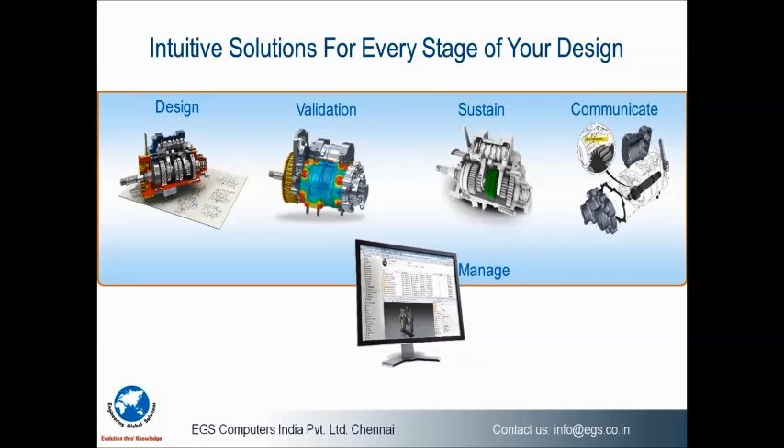So in this, we are going to see the two new tools. One is MBD and another one is Visualize. Okay, what is MBD? MBD helps to define, organize, and publish our 3D product manufacturing information to the manufacturers. It helps to streamline our productions, cut our design cycles, and make error-free diagrams. And we can also comply with new standards of drawings with MBD. It mostly helps us avoid misinterpretation of 2D diagrams.

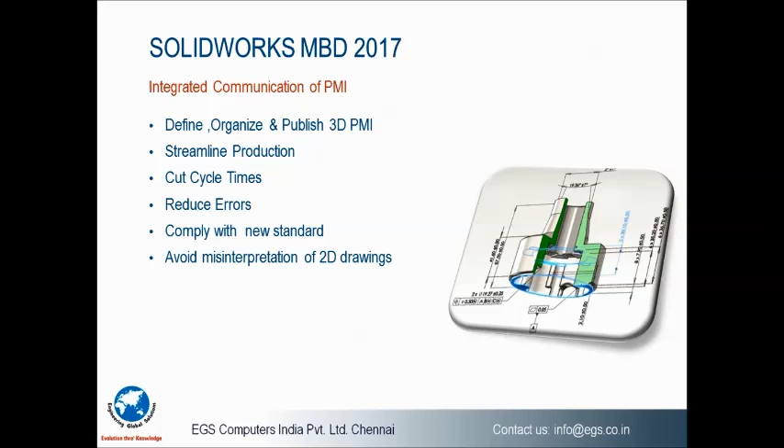Okay, one of the major areas we are going to focus on today is technical communication. And the problem is today we are still communicating with 2D orthographic diagrams, using things like dimensions and tolerance in order to define the design intent. Okay. So this is basically our 2D orthographic diagram. Mostly we use these diagrams to communicate to our manufacturers, correct?

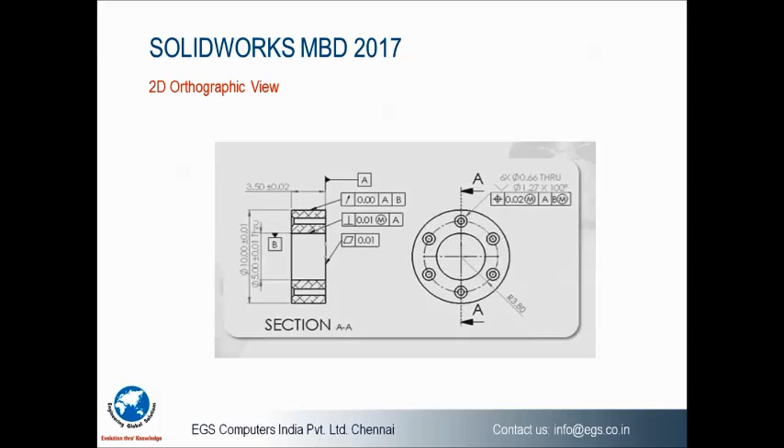So what is the problem in that? Most of our designers spend more time creating these 2D diagrams, and it is time consuming and also very costly. Still our design team is spending more time on creating these 2D diagrams. So what has happened exactly? Due to this our cost and also our time was increasing.

Okay, so coming to the solution. What is the solution to this? Previously, we would create our designs and after that go for 2D diagrams. Now these MBD tools help us designers to create the designs and also communicate the product manufacturing information in the design stage itself. Okay, what is MBD? MBD is a practice of using the 3D model, such as solid models, product manufacturing information, and associated metadata, to define the individual component and also the product assemblies.

Okay, so what is MBD? MBD is model-based definition software. It's a practice of using the 3D model, such as our solid models, product manufacturing information, and associated metadata, to define the individual component and also our product assemblies. Okay. So now I'll just go a little bit deeper.

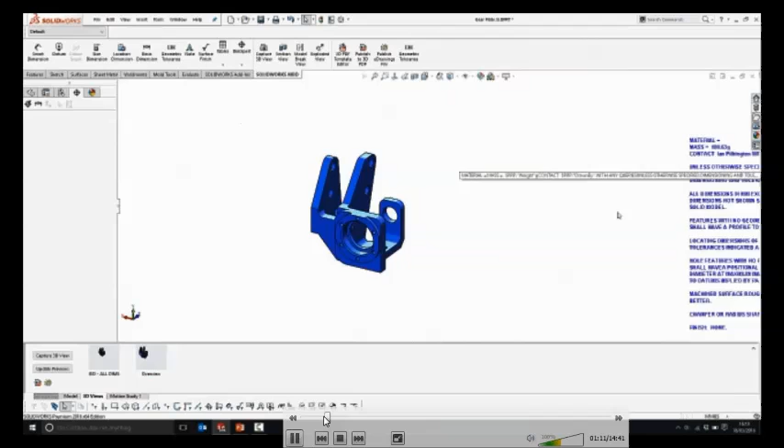And also whenever you have library features like annotations or notes, we can easily use them from this library. Previously I just created these annotations. Now I can go to the library, drag it and put it on the screen. And this information gives all the manufacturing information. And also we can customize these annotations.

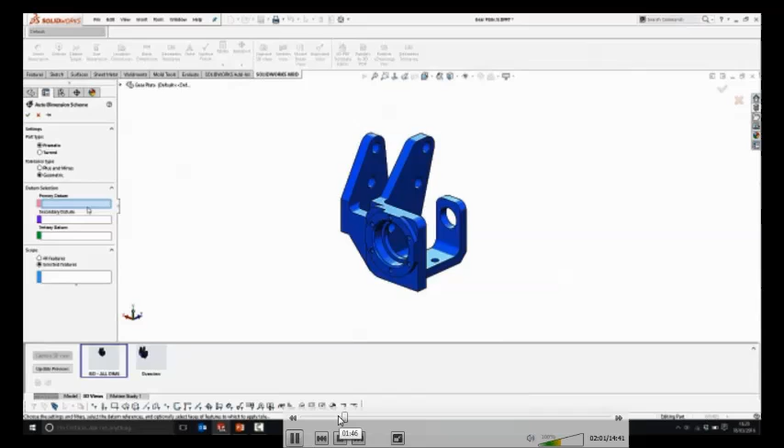Next we are going to see the auto dimensioning scheme. What are auto dimensioning schemes? Here we have two types of methods: one is prismatic, another one is turned. Mostly for milling components we go for prismatic, and for turning components we go for turned.

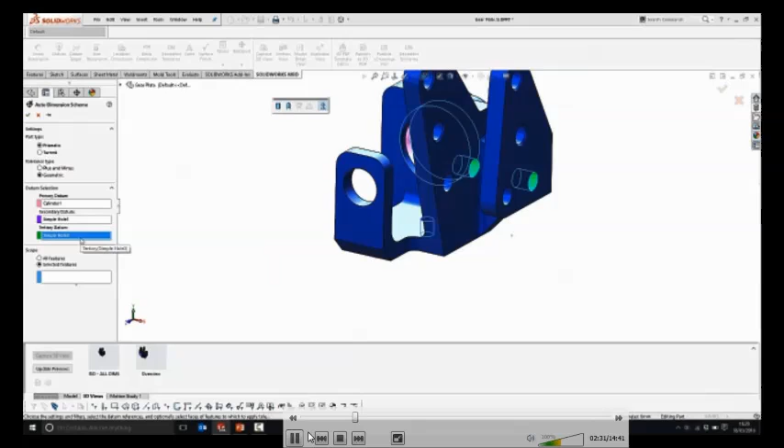So now in this part we are just going for prismatic, and for creating the tolerance I am selecting the reference, and also I am selecting these two holes. So here I have just given the primary, secondary and tertiary datums as a reference for creating this tolerance.

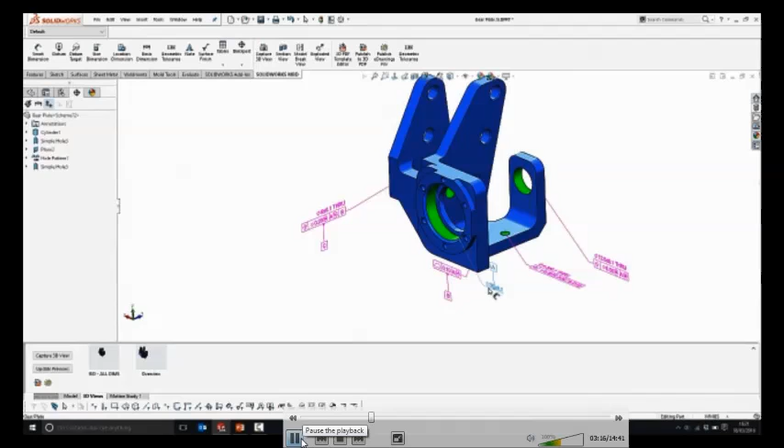And I can select these two surfaces. Here is the beauty of this MBD: once the part is fully defined, it will show in green color. Now I just selected these two surfaces for creating this tolerance and dimensions and also annotations, which we have previously noted.

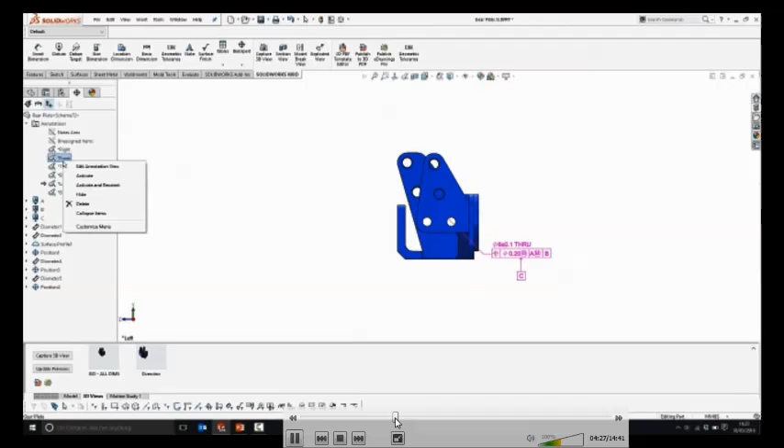And in this dimension manager tree, we are able to see the datums, dimensions, surface profiles, and the tolerances which we have given. And using these views, we can easily rotate the views also.

So mostly on the manufacturing side, whenever you are going to manufacture any part, we need some views, correct? In this we can create our own views also. We can customize the views also. And after customizing the views, we can give all the dimensions, tolerance values and annotations, and we can easily capture this. Here I'm just selecting and giving some dimensions from this hole to that hole.

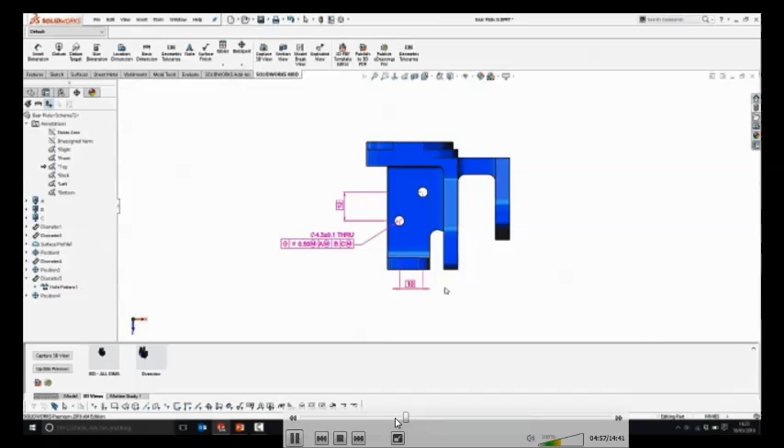And one more advantage is, we can easily change the annotations from one view to another view, and also give some tolerance values. And after giving this, we can orient this view.

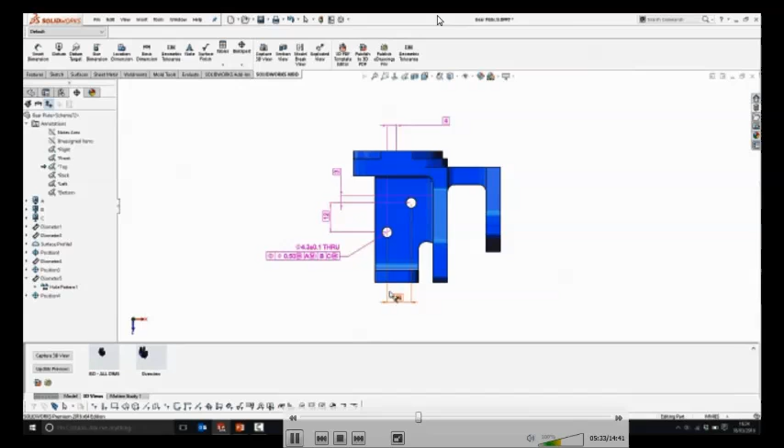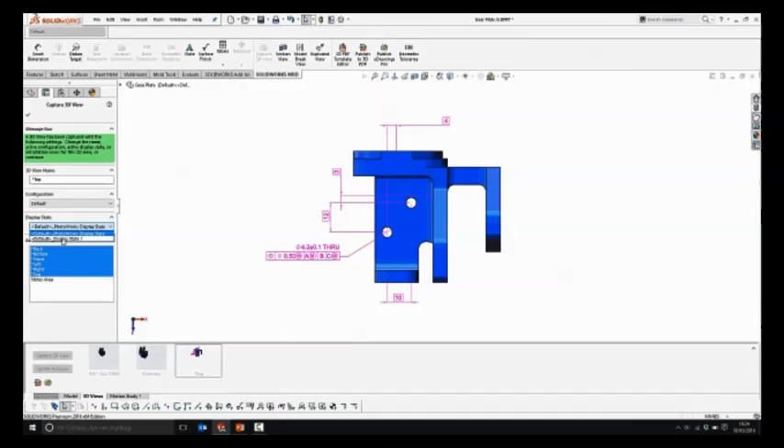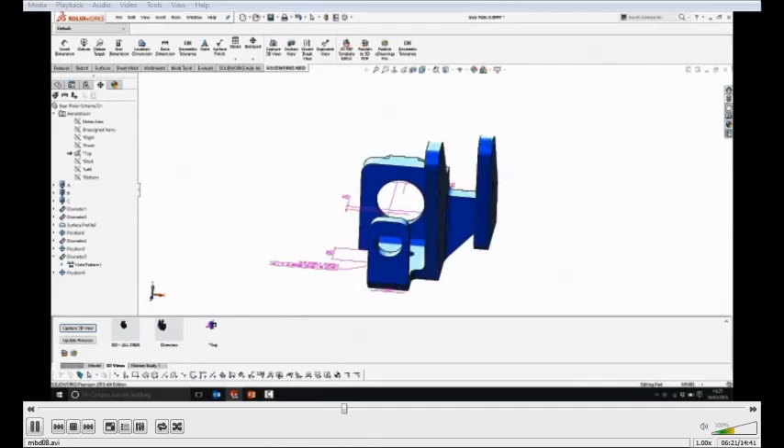Hello. Hello. Hello. So on. Hello? Sorry, gentlemen, kindly unmute yourself. And one more. Can you hear me?

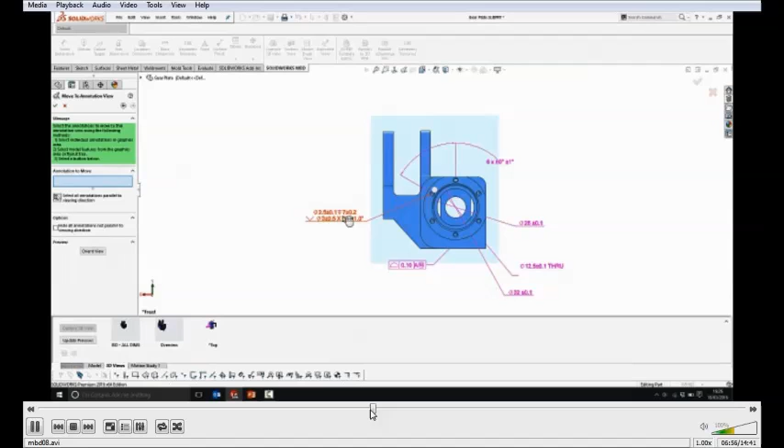One more advantage of creating these dimensions and annotations: we can capture these annotations and dimensions from one view to another view. I'm just capturing these annotations and transferring them to another view. And once they are transferred, we can easily keep them in one view, and you can capture the view also. So like this, we can create our customized views, which are mostly required for our manufacturing information.

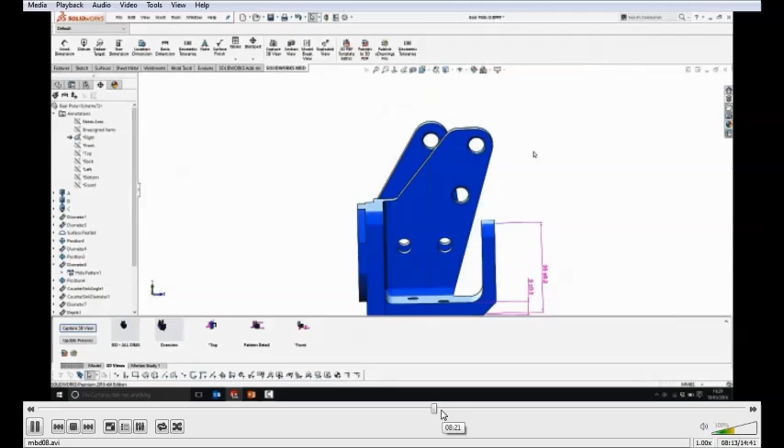Exactly how we give the dimensions for a part, we can easily give them for the part in MBD also. We can select our own standards also. We have different types of standards like ISO, JIS, like that. By default it will take the ISO standard. We can customize our own dimension standards also. And after giving the dimensions, we can easily capture the view, and we can easily switch to any view also.

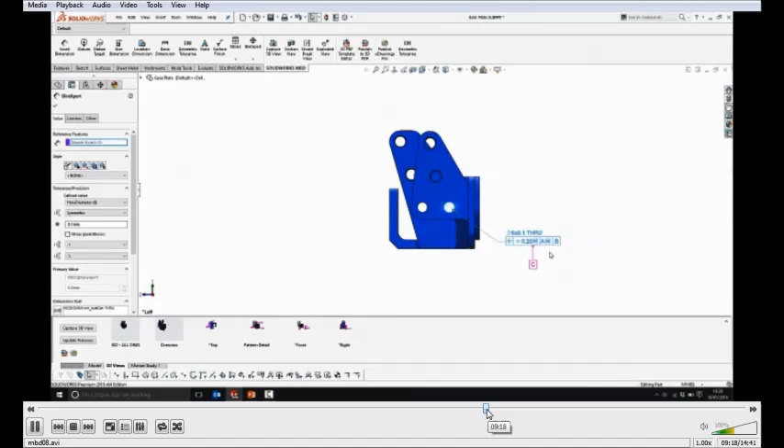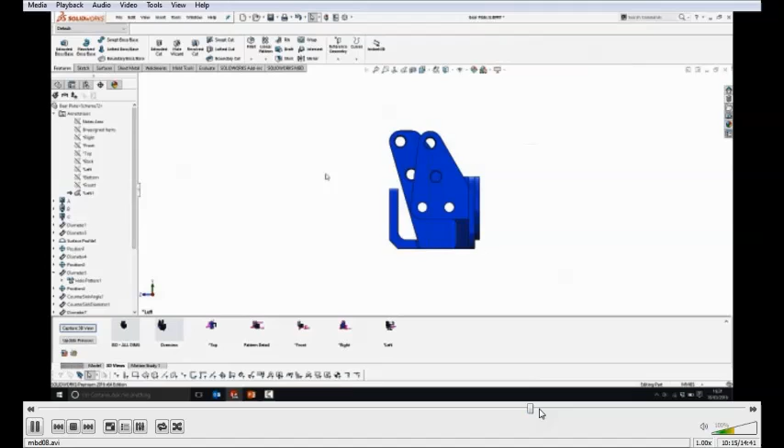So here I have given all the dimensions and information required for the manufacturer to manufacture this component. So I have got the dimensions, annotations, and also the reference datums, with which the component can easily be manufactured, after capturing this view. And I have given the annotations also.

One more advantage in MBD: we can go for section views also. You can easily section the views. And also we can transfer to display states. And after that we can capture the views. At any time I can activate any view. So it is very easy for identification, and to get all the information about the particular part.

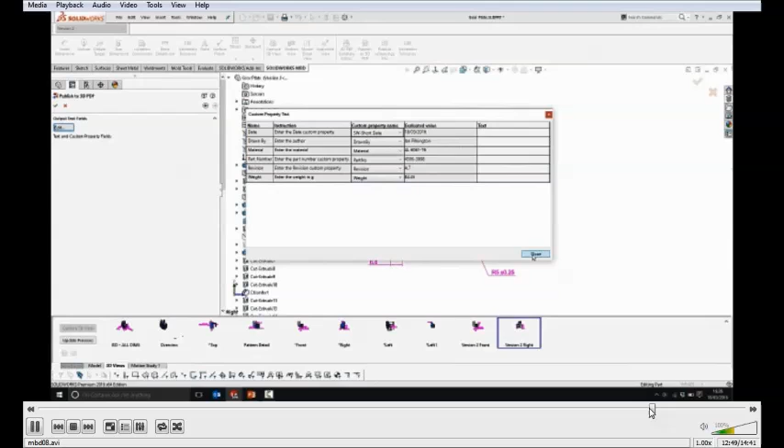And now I'm taking all the information to the 3D PDF. While sending to the 3D PDF, I can select my own template also. We can customize our own template, or we can create our own template. After selecting the views we want, we can select all the views which we want to export to 3D PDF. And while exporting the 3D PDF, we can also customize our own properties, exactly how we give the properties for a part.

I'm just exporting to 3D PDF. The information which I created in this part is easily exported to 3D PDF. The main advantage in the 3D PDF is we can easily rotate, zoom, or pan the views. And you can easily see the notes and annotations which we have given in the right corner, and the date, times, material, mass calculation, whatever we have given, it will easily update in the template.

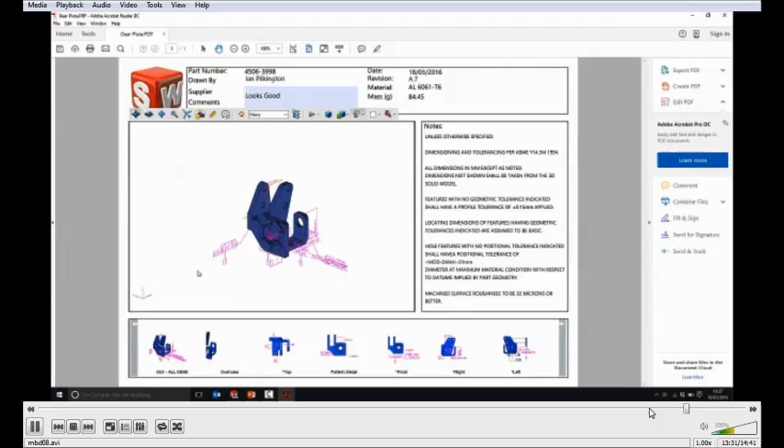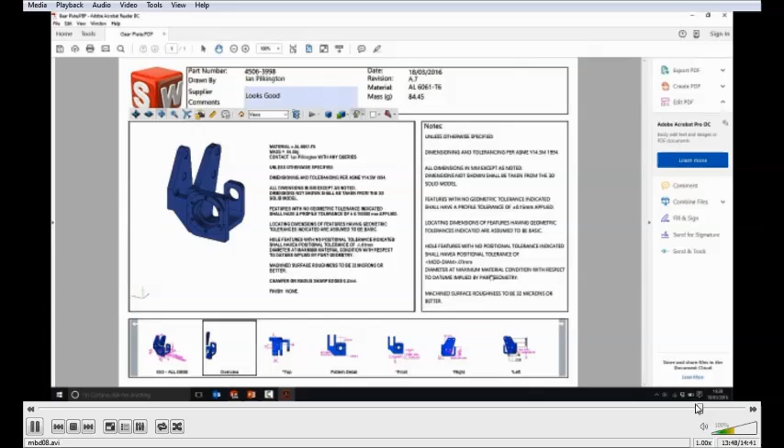In this 3D PDF, we can switch to any view, and you can also write some comments to the supplier. It is very easy to communicate. The supplier can easily view the component in 3D, not in 2D. And the annotations which I have given, we can also get them in the 3D PDF. I can switch views.

So the annotations and geometric tolerances which I have given in the views, we can easily shift to all the views. Now we can easily check them in this 3D PDF by simply rotating and zooming. The same thing we do in the part, we can do here in the 3D PDF, simply by rotating and seeing all the annotations.

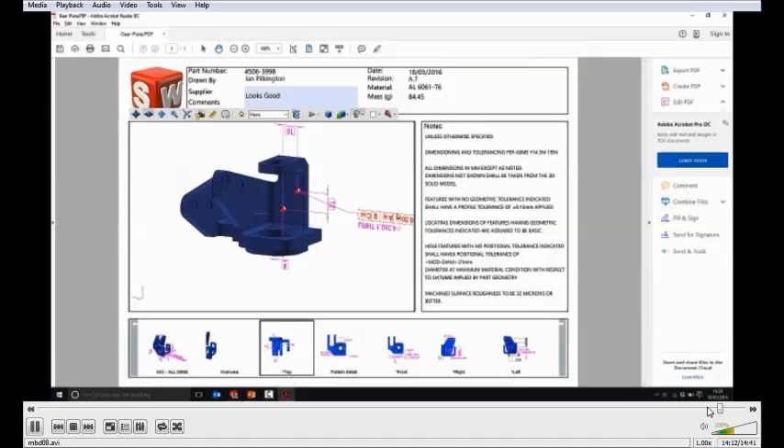And one more thing, we can easily transfer all the information through eDrawings also for technical communication. I just created the 3D PDF, and after that I just sent this diagram to eDrawings. In eDrawings, same thing, whatever views were created, automatically it will be updated. I can shift to any views. I can see all the tolerance values, dimensions.

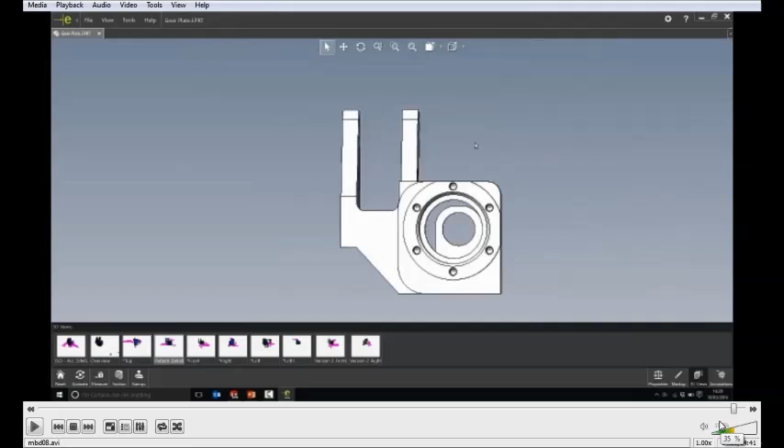The tool is easy to communicate for our suppliers. So here I'm shifting the views, and I can see this tolerance.

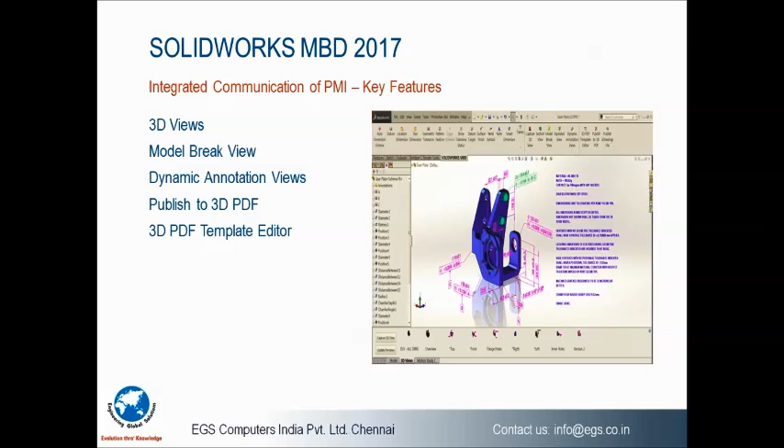Okay, so this is one sample video about creating 3D views, model break view and dynamic annotation views, and how we can publish a 3D PDF, and also how we can create our own customized templates. So these are some of the key features in MBD. It helps to capture the product manufacturing information.

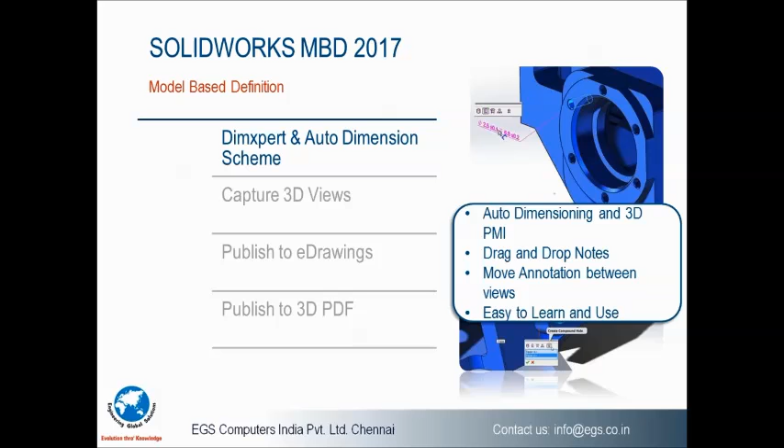So in this video we have seen how to create the auto dimension by using DimXpert, and same thing, how to move the annotations between the views and drag and drop the annotations. And we have seen how to capture the 3D views also.

And in capturing the 3D views, we can use the configurations also. Multiple configurations of the views will be captured. We can shift to any configuration, and you can capture the views also. So that particular view which contains the dimensions, tolerance, everything will be shown here.

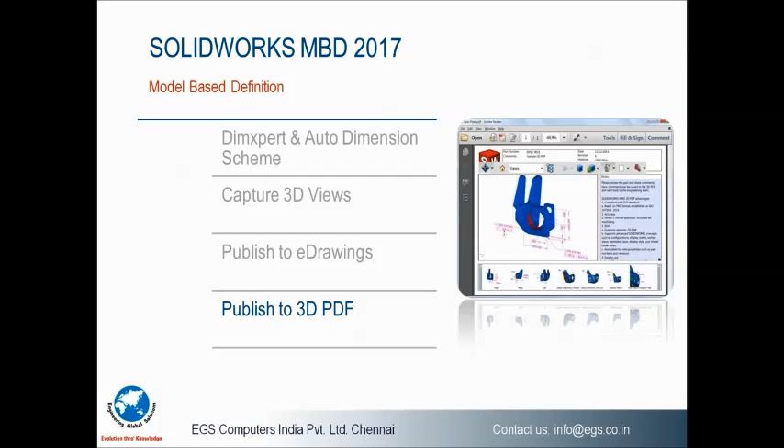And also we have seen how we can easily publish these details to eDrawings for technical communication. And also we can publish these to 3D PDF. There we can rotate, zoom and pan the views, and we can easily identify the part and also what tolerance dimensions we have given to the part. It is easy for the manufacturer to manufacture this part.

Okay, so finally, what are the benefits we are going to get? Using this MBD, 30 to 50% of design time will be reduced, because most of our designers were spending most of their time creating detailing diagrams. So through this MBD, any designer can give all the tolerances and information required to manufacture in the design stage itself, and also he can capture the views and the annotations.

So now in this case, we have just created the model in the SolidWorks environment, and due to this MBD, we can give all the information related to the manufacturers in the same window itself, and finally we can publish this into eDrawings and also 3D PDF. And here we have an easy option for portable delivery. I will explain this portable delivery in the next slide. So due to this, our cost will be saved, our efficiency will increase, and it is fully error free.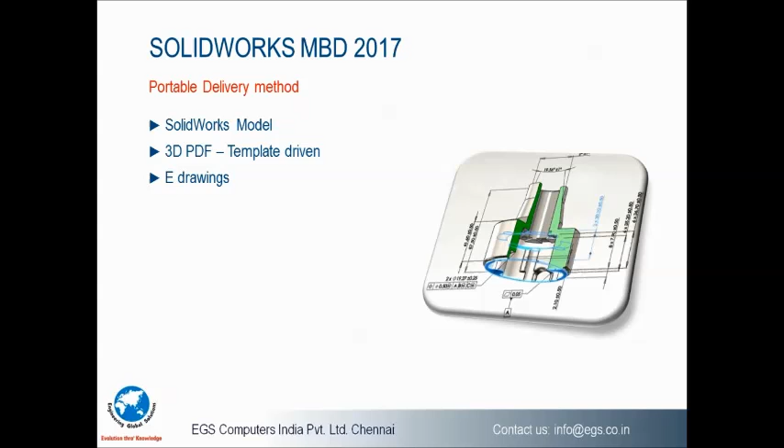In this MBD, we have 3 portable delivery methods. That means when we give the information, we can give it as a SolidWorks model, in 3D PDF, and also as eDrawings.

And these are the benefits of using this MBD. The first thing is drawingless manufacturing solutions, and it is an integrated tool which works inside SolidWorks. It helps give the manufacturer all the information directly in 3D. It helps to reduce our design cycle with error-free diagrams, and it mostly helps to improve the quality of our diagrams also.

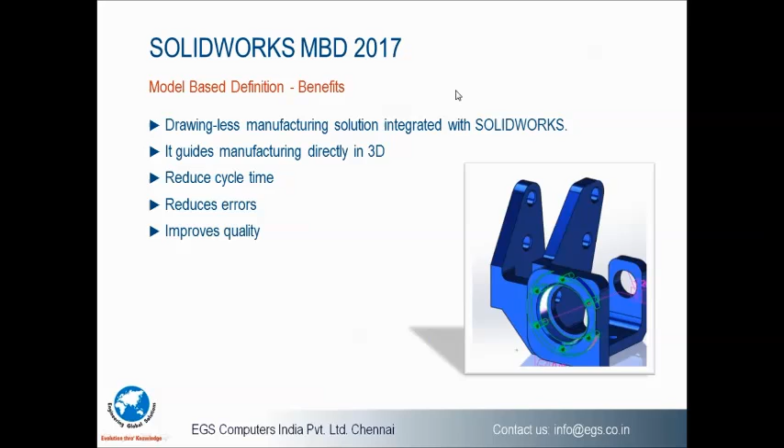So that's all about MBD. So next we are going to see a small demo on Visualize. So these are the benefits of MBD. And next we are going to see Visualize. It is a new tool. So mostly it helps to give photorealistic images, and also it helps to create professional images.

And a new home screen, giving a more centric experience when accessing recent projects, tutorials, tips of the day, helping you get the job done fastest. What is Visualize? Formerly, SolidWorks Visualize was known as Bunkspeed, and it is a standalone software.

It mostly helps in industries related to creating marketing documents, and also for rendering capabilities. So who can use this Visualize? Mostly designers, engineers, marketing, and all who are related to content creation can use Visualize, and it is a very easy to use tool.

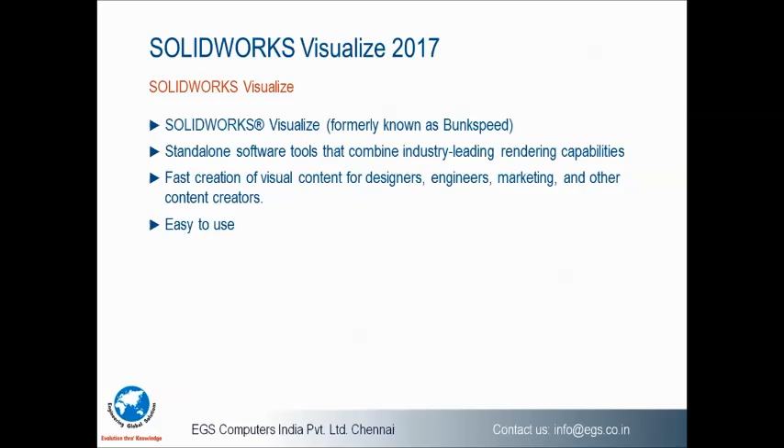And this is our new home screen of Visualize. So you can see on this right side, we have this option called tip of the day, and also at the bottom you have the link. You can directly access the help files of Visualize and what's new in 2017, everything.

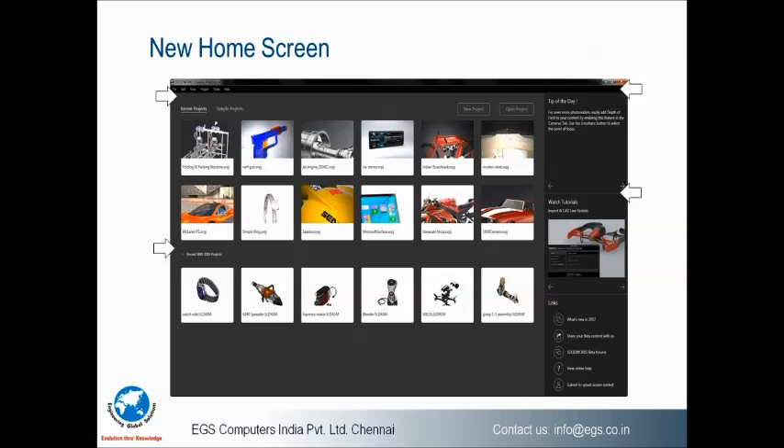And here we have recent projects. So whatever projects we have taken into Visualize will be in here, and we can easily open them one more time. And these are sample files which we have used in 2016 or 2017 Visualize.

We have two packages in Visualize. One is Visualize Standard, another one is Visualize Professional. And today we are going to see Visualize in depth. Whatever explanation I am going to give, it's for Visualize Professional. This is the main concept of Visualize. First we'll open the CAD file, we'll do painting, and also we'll create the scenes. We can add some cameras, and finally we can go for rendering.

So first, this is the graphic user interface, where you can select the new project. Once you click new project, you have the option of creating new projects, and we can easily import the part. After that, here we have an option called monitor file. Actually, what is the use of the monitor file? For example, suppose in SolidWorks you are doing the part model, you are bringing it directly to Visualize and you are doing the rendering.

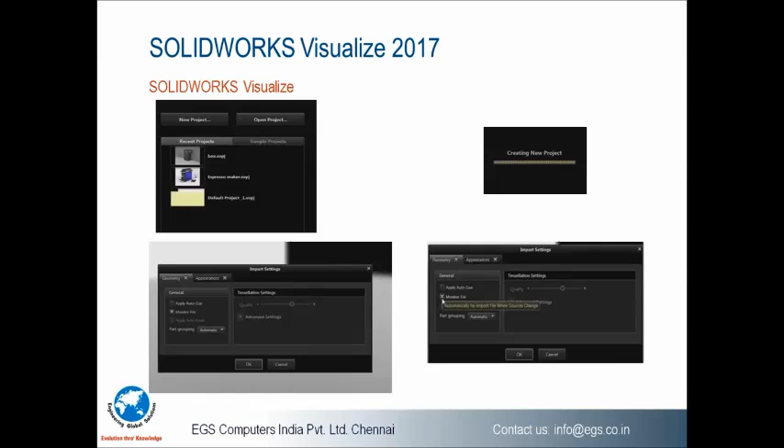So after that, I'm just changing the part files in SolidWorks. It will get automatically updated in Visualize. Whenever you re-import the same part file, the source file, it will get automatically imported. So that is the use of this monitor file. There will always be a link between SolidWorks and Visualize. In the coming slides, I will explain how we can use this tool.

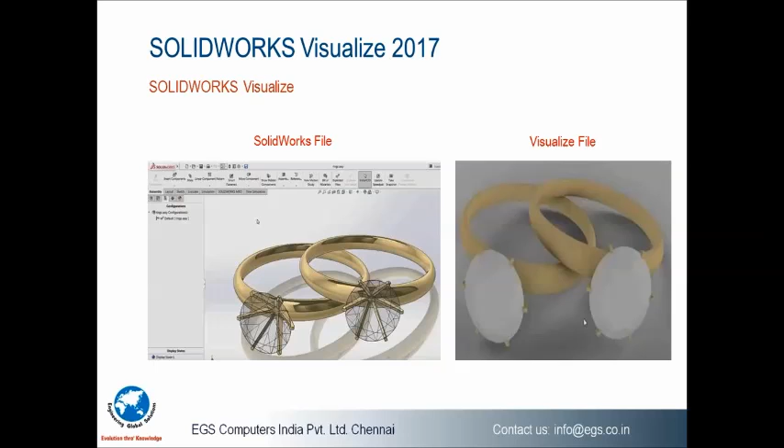And now you can see this. I have just taken an example of the ring. The particular ring which we created in SolidWorks, and after that, the same file which we have shown in Visualize. The colors shown in Visualize are the colors which I have given in SolidWorks. Just have a look at this video.

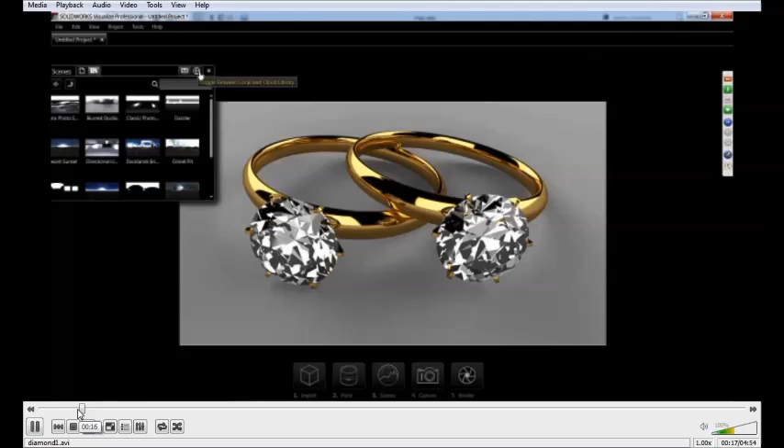After importing this part, I am selecting the appearance. So here we have a number of appearances, and we can also customize our appearance. Wherever you have any images, we can download them. We can create our own scenes also, which helps for creating a new environment. I'm just selecting the surface. I have just given some appearance.

The same way, we can zoom it, pan it, and also rotate it. So here we can go for rendering options. In this rendering option, we have the options called preview and also fast. It's mostly related to the graphics card. First, I am just going to render this one as fast.

So once I have given this appearance, and also the camera and environment settings, I am just going for rendering preview. You can see this final component which was rendered, and also you can see this animation in Visualize of the particular part.

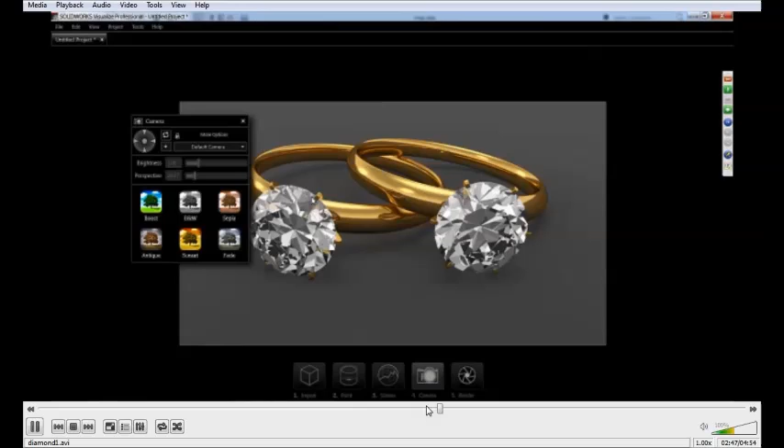So I'm just adding a camera to this. For example, if I want to adjust the light settings, through the camera we can adjust both brightness and perspective. I'm changing the brightness in this. By default I have some brightness in this.

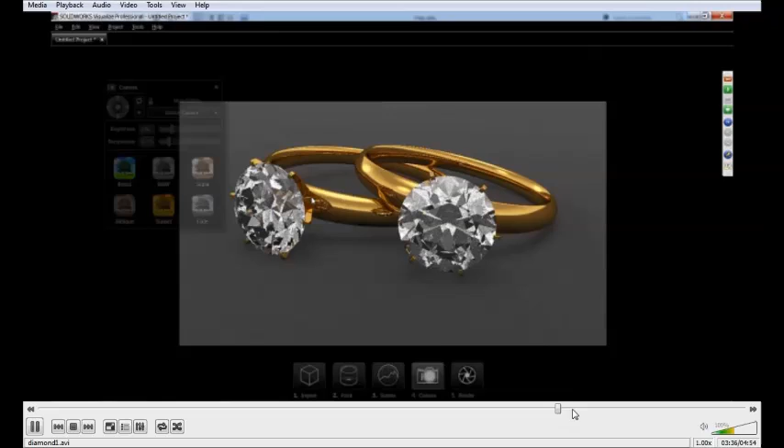We can also get these by downloading from the internet, like sunset and other environments. Whatever images we select, we can upload them and apply them here. This is the most important thing. After that, selecting the render options, we can set our own resolution. You can see in size, we can set our own resolutions. By selecting our own resolutions, we can also set the time.

And finally this particular component has been rendered, and this is the image file. See, these images are the images which we have created in Visualize.

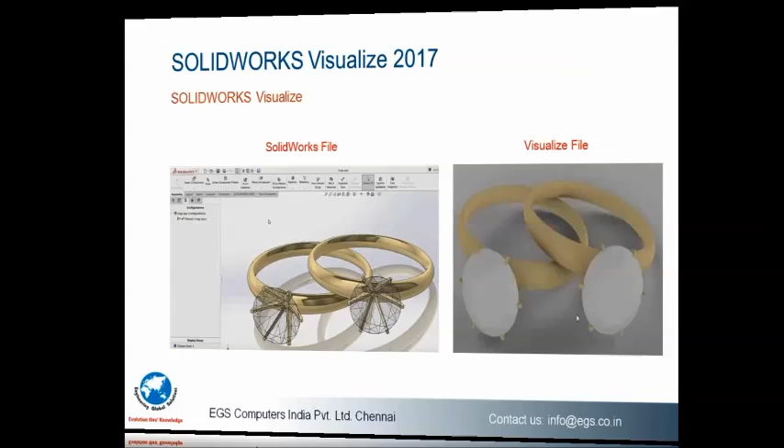Then we can come to see these import options. SolidWorks Visualize has the capability to import different file types. We can import Autodesk, CATIA files, ProE files, Solid Edge files, and Inventor also. So these are the import capabilities.

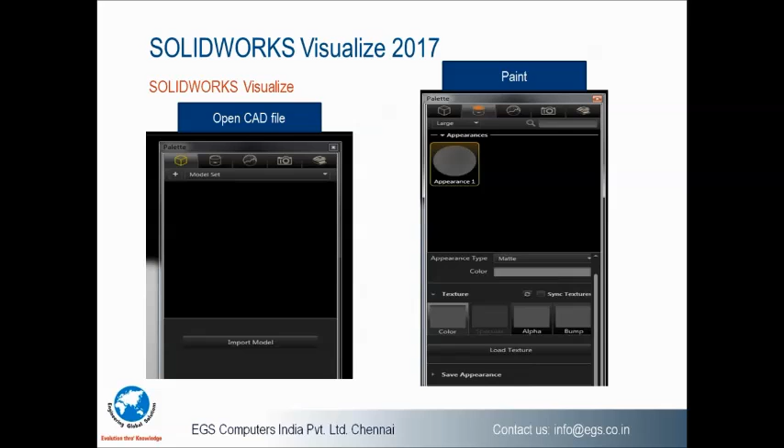So previously I explained the concept of Visualize. First we open the CAD file. This toolbar is called the palette. In this palette we have 5 options, like model set and also appearance. I will explain them one by one. First, for opening the CAD file, we go to the model set. There we have the option called import model. And for giving paint, we have the option called appearance. There we can set the color and also textures.

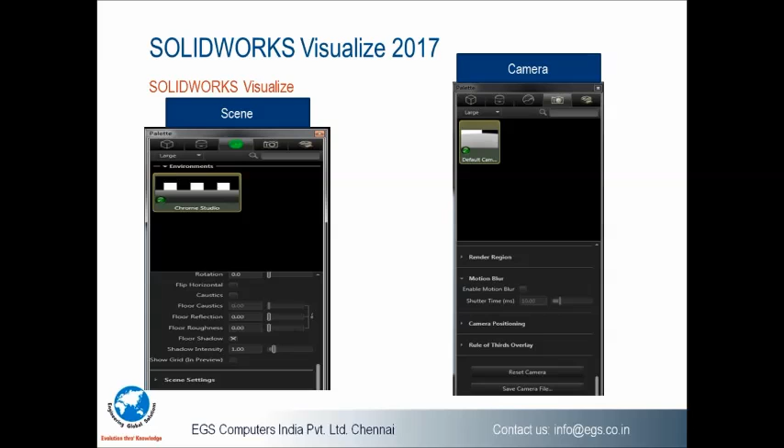After that, in scene, I can select my own environments. In this, we can set the rotations, and also the reflections, roughness, shadow, lighting, intensity, etc. And I have selected the camera also. We can position the camera in our own customized way. And finally we can go for render.

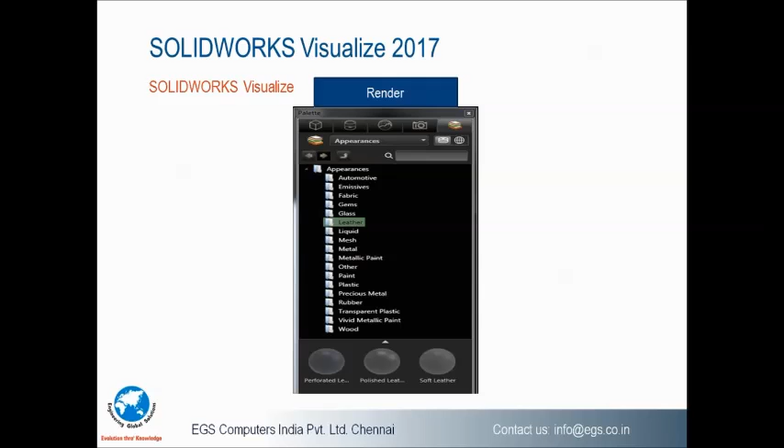When you go to this render palette, we can see there are different types of appearances. They relate to many verticals like automotive, emissives, fabric, glass, leather, liquid. For everything we can select this. And this is our new camera navigation environment in SolidWorks 2017 Visualize. The right side is our palette, and at the bottom we can see the animations.

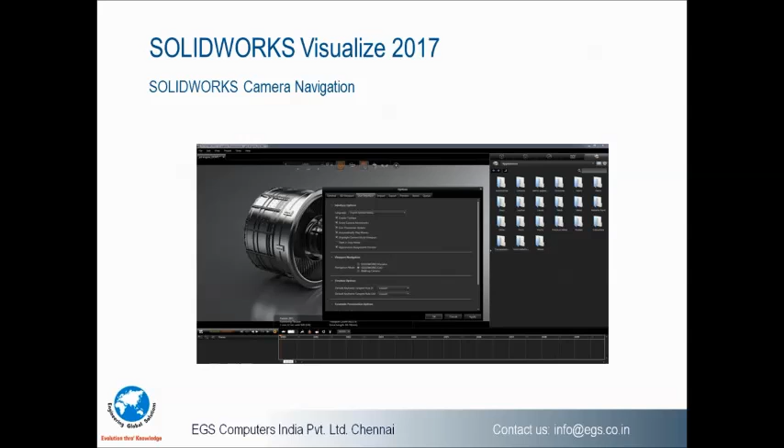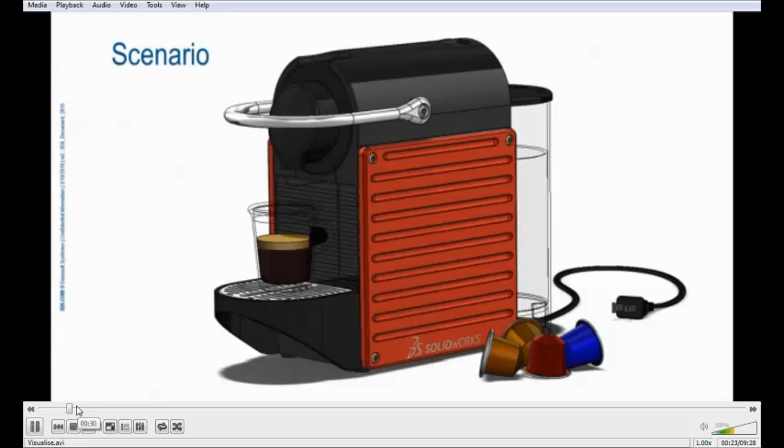Just have a look at this video. This is a coffee machine which we have done in SolidWorks Visualize. First, I'll just import the part. After importing in SolidWorks Visualize, I will create the groups. Just like we create assemblies, we can make a group. For example, I can select these 2 or 3 parts and make one group, and after creating the groups, I can apply my own color through the model set. You can see on the right side, we have the model set here.

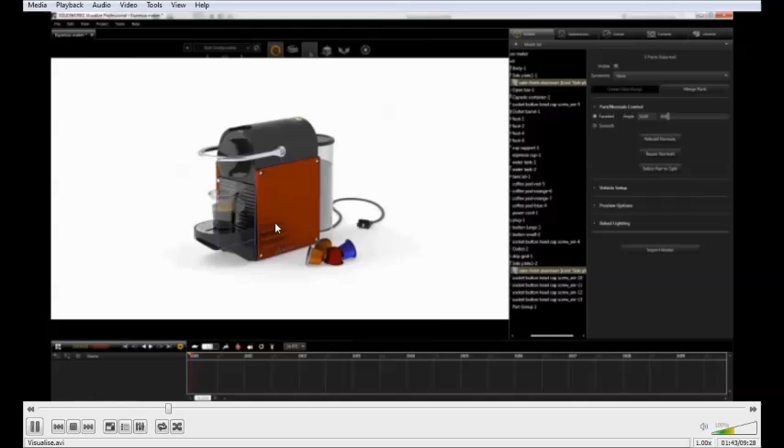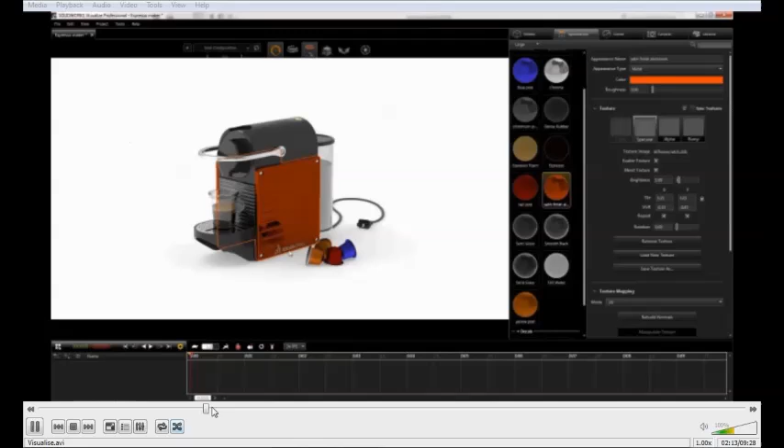So now, the features required to create the part are shown in the model set. I have selected these 2 parts, created the group, and I am going to apply the appearance. And I am giving this color also. We can select our own colors. I can also apply the textures through the appearance window. Just drag and drop. You select the color and change the roughness, and after that you just drag and drop it on whatever faces you require. It is very easy to update.

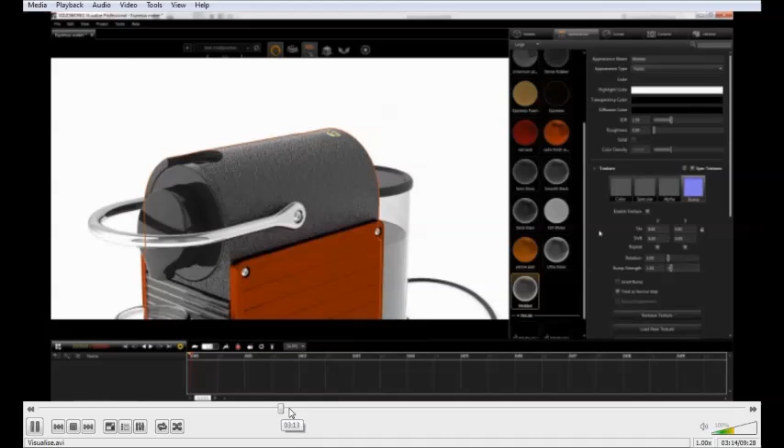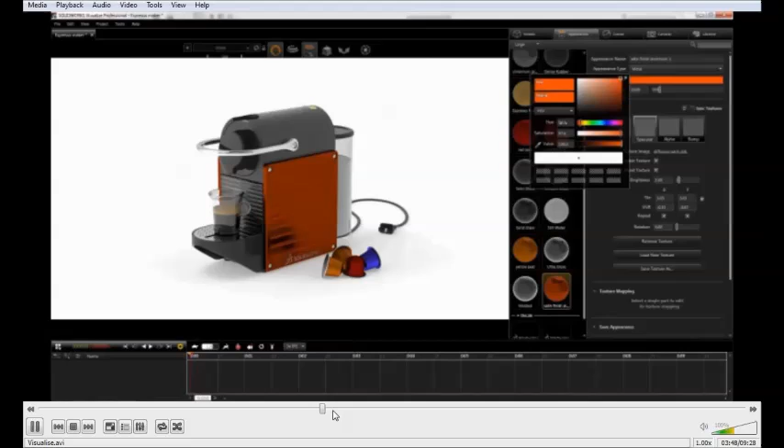We can also create configurations. For example, I have selected 2 or 3 parts and made them a group. After making a group, I applied some color and textures, and I can make it a configuration. And I can do the same thing vice versa. I can select 3 or 4 parts, make them a group, put it in a configuration, and after that apply the texture.

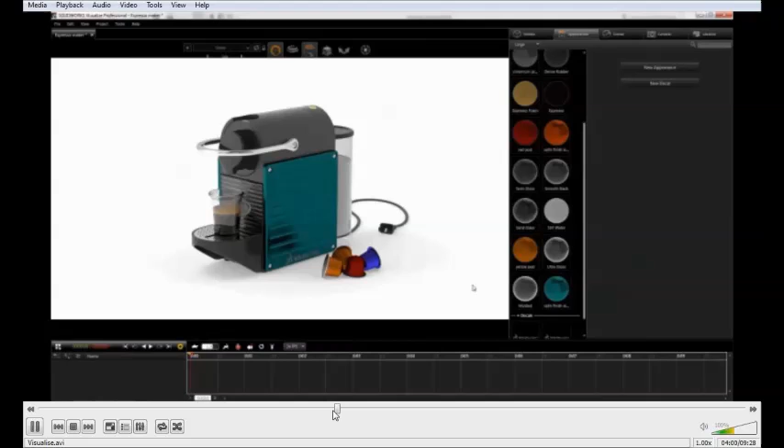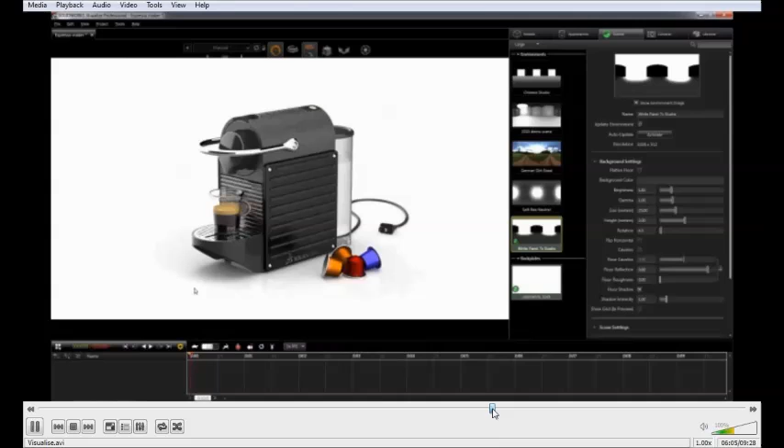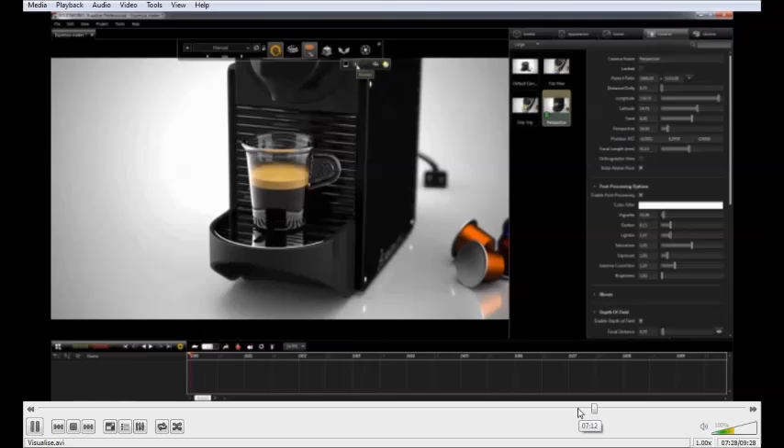And I can create my environment through this lighting. I can also set my own camera, where I can reduce the brightness. After that we can capture it as a view. Once you have applied the appearance, textures, and camera settings, we can capture it as a view. And finally I can go for render. I can select this render. I can give my name also. And finally I can render this part.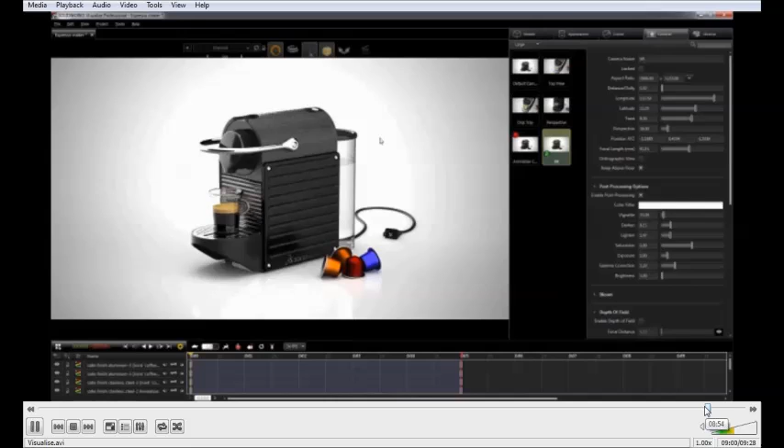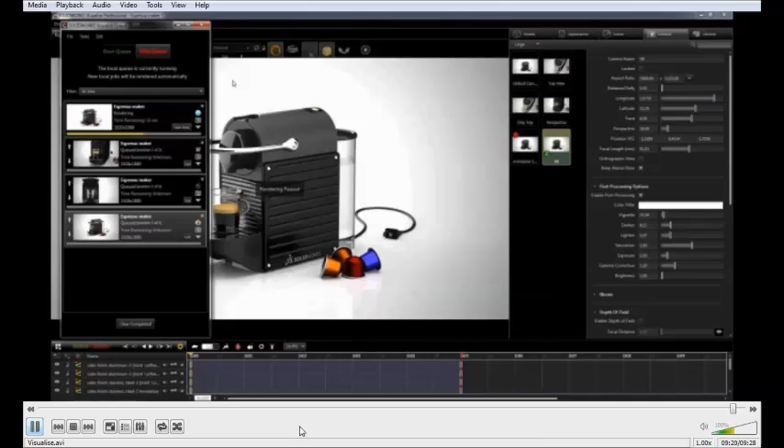Whatever views we have selected will be in the queue, so I can render in a queue also. Once I have selected the view and given the render, once it's completed, it automatically starts the next in the queue. Like this we can render 3 or 4 views simultaneously. For example, I need the same part in different views, in different colors. I create them in the queue, and finally I just render it. And this is about SolidWorks Visualize.

Let me summarize what we have seen. It helps to create better looking images using advanced lighting options and also post processing options. We have created animations using the timelines and animation ribbons. We have created interactive web content. We have created configurations for higher productivity in creating content. And we have seen the render queue also.

So these are the benefits. Mainly it helps improve internal design engineering, helps sales reviews make more educated final decisions, drastically reduces the cost and number of physical prototypes, and helps reach final design decisions more effectively. It delivers photorealistic images and content to marketing much earlier to help promote the newest product, it is time saving, and overall it gives a better final product.